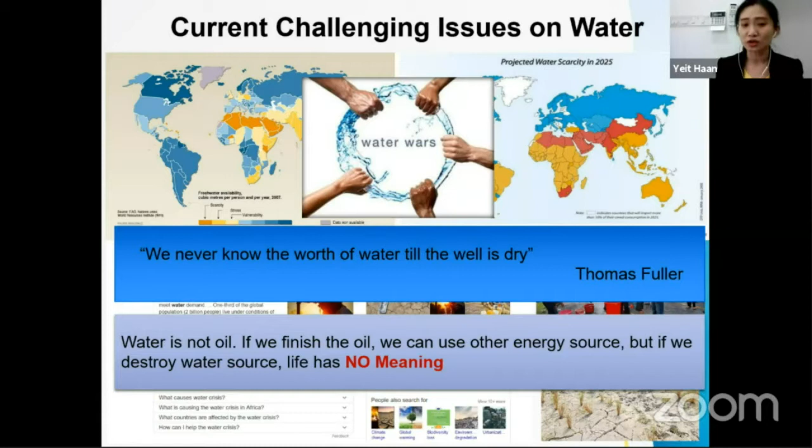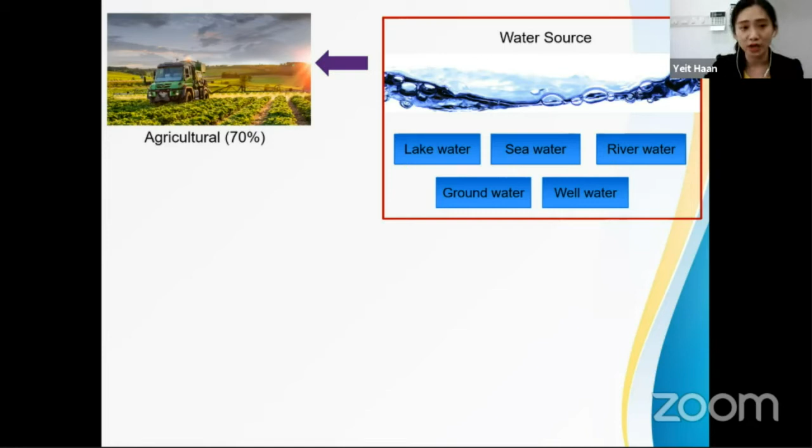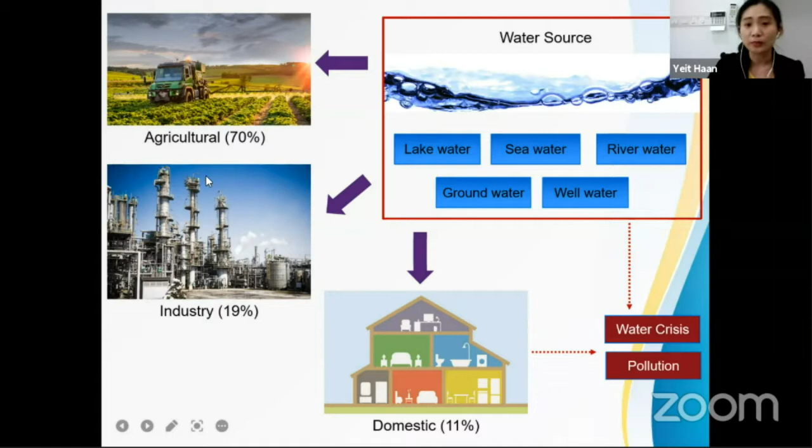Water is also not oil. If we finish the oil, we can use other energy resources like renewable energy to replace it. But if we destroy water sources, life has no meaning. For water sources, we have plenty, like lake water, sea water, river water, groundwater, and well water. And for the distribution of water usage, about 70% is used for agriculture, 19% for industry, and about 11% domestic. However, because the water we can utilize is very limited, there is a potential for water crisis. At the same time, the processed water from industry can cause pollution.

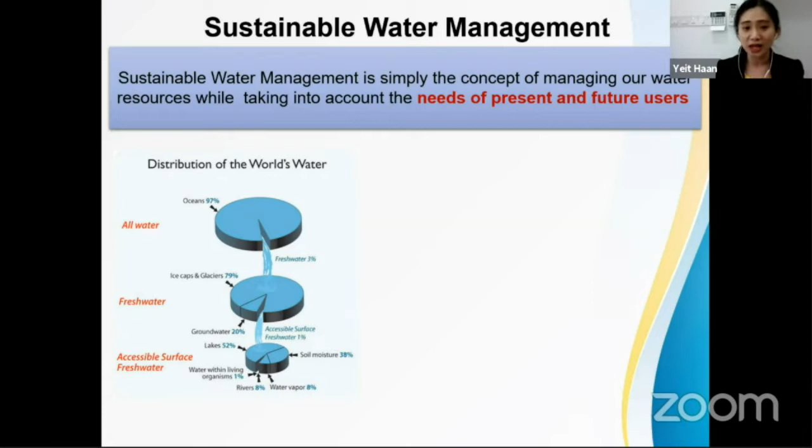So I would like to introduce to you the sustainable water management concept. Sustainable water management is simply the concept of managing our water resources while taking into account the needs of present and future users. So this is the distribution of the world's water. As I say, our planet has plenty of water. The ocean itself consists of 97%. However, the fresh water that we can utilize is only 3%. And out of this 3%, the accessible surface fresh water is only 1%. Can you imagine that? And in Asia especially, water use is the highest in the world.

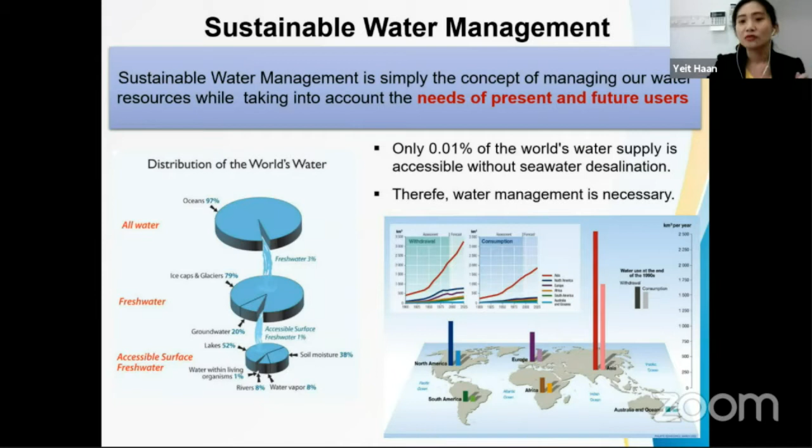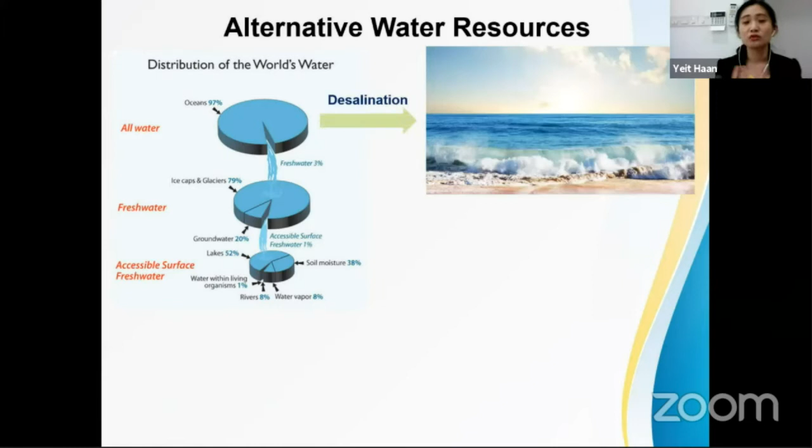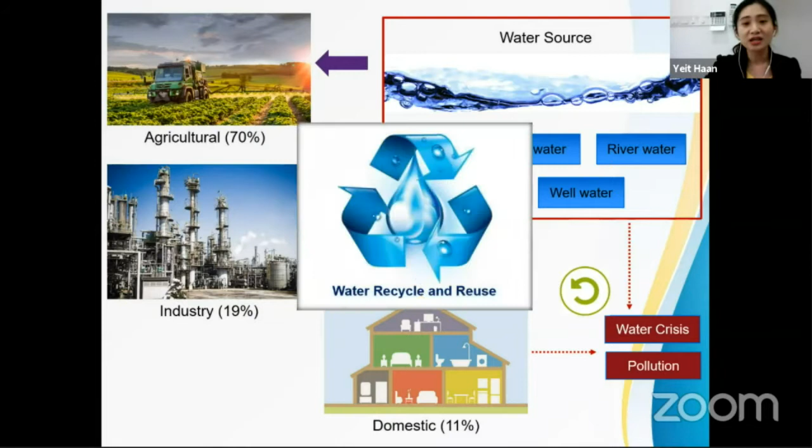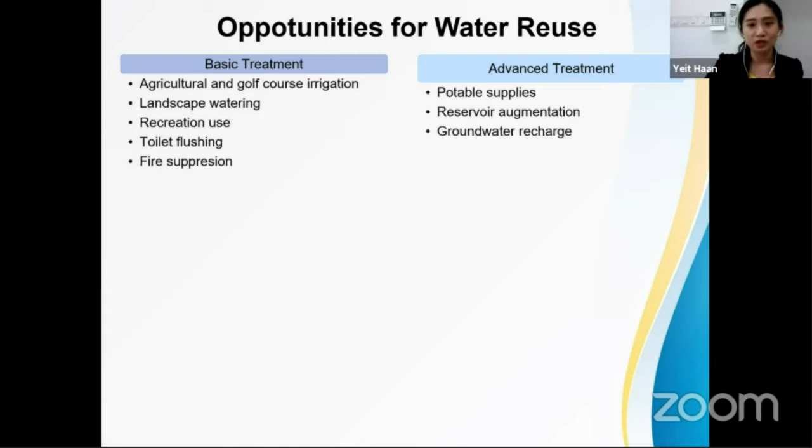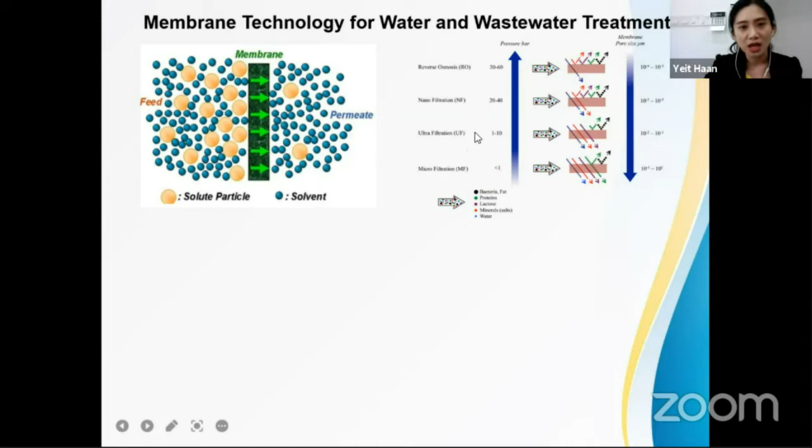So I would like to introduce to you a technology used for water and wastewater treatment, which we call membrane technology. In simple words, it is just a semi-permeable membrane used in a system whereby a physical separation process separates the solute particles, while allowing the water to penetrate through the membrane pores to achieve clean water on the permeate side. Membranes have different categories: microfiltration, ultrafiltration, nanofiltration, and reverse osmosis. It depends on the operating pressure as well as the pore size of the membrane. And each membrane also has different rejection ability, increasing from microfiltration, and the highest one will be reverse osmosis.

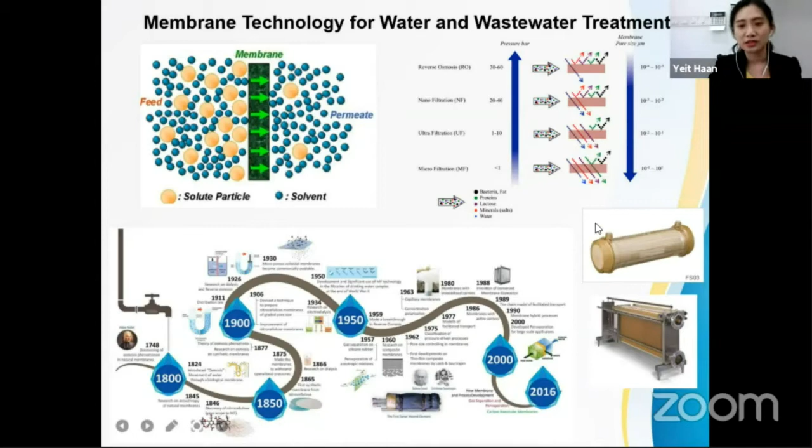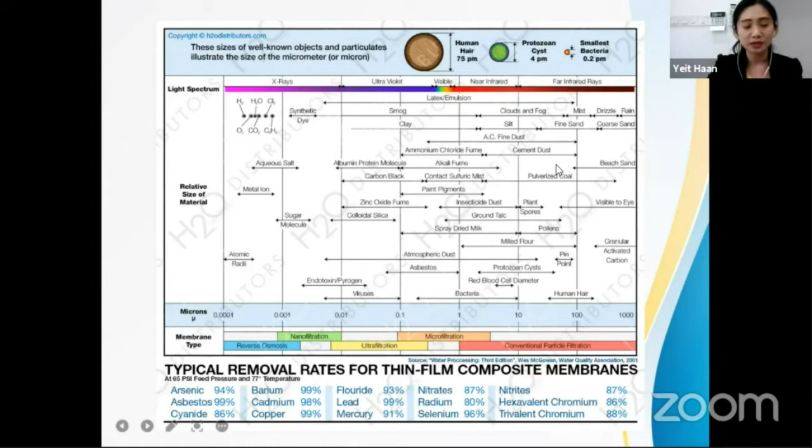And this is the development pathway of membrane technology. And here is the example, or the photograph, of the membrane and how it looks. And this table shows you the rejection ability of different membranes and the size of the materials that each membrane type can reject.

So for us, especially as researchers, we know that the technology is ready. Most of the technology is already developed from the R&D perspective. And there is an industry that is really ready to take on this technology. And why not? Here comes the collaboration between technology and industry to create larger revenues for the water and wastewater industry. So let's take a closer look at our nearby country, Singapore.

The project in Singapore, the NEWater project for water recycling. This is the process of NEWater in a Singapore treatment plant, and they are using membrane technology to achieve water reclamation. The treated used water passes through the membrane. The membrane is here. They are using both microfiltration and reverse osmosis membranes for disinfection. And at the end of the day, they were able to obtain high-grade reclaimed water.

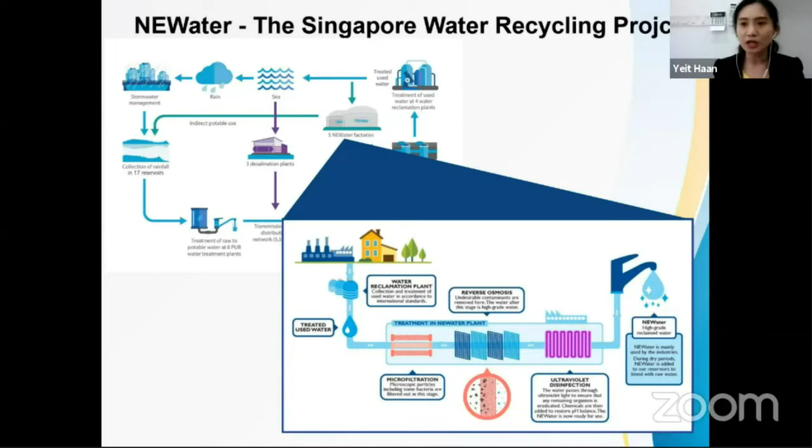So at this standpoint, I started to ask myself, is there any possibility that Malaysia also has this capability to do the same thing or even better? And here started my journey to sustainable water management.

So the report from the Singapore Water Reclamation Study Expert Panel review findings shows that the physical, chemical, and microbiological data for NEWater are well within the latest requirements for the US EPA Drinking Water Standard and WHO Drinking Water Quality Guidelines. Exposure to or consumption of this NEWater does not give any carcinogenic or estrogenic effects on the fish. NEWater is considered safe for potable use based on comprehensive physical, chemical, and microbiological analysis of NEWater conducted over 2 years.

And with this, I started my project in collaboration with Indah Water Konsortium Sendirian Berhad. Indah Water approached me for a project whereby they would like to add value to their treated sewage or treated bioeffluents. So to add value to their treated effluents, we went through a study on effective and economic disinfection, because we would like to kill the bacteria inside the sewage water so that the treated water can be safe for human body contact.

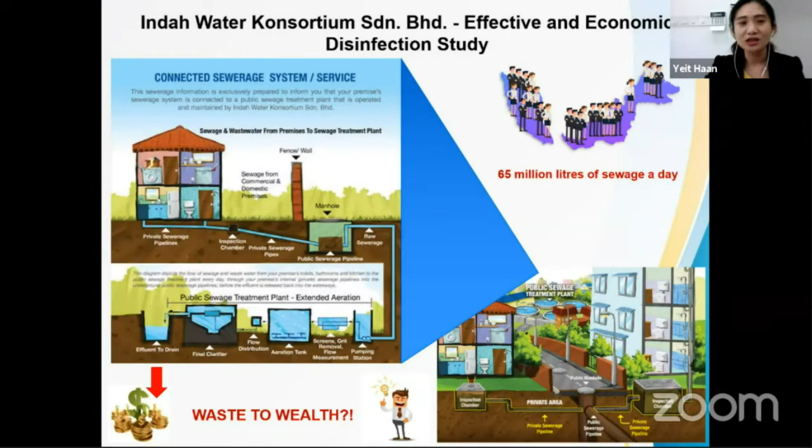And this is the connected sewage system or service. I believe there is no need to go deeper. And we know that Indah Water Konsortium Sendirian Berhad serves Malaysia, and about 65 million liters of sewage are treated a day. And let's think about the waste to wealth concept and how much we can gain from it. So here I started with my planning, whereby I have several treatment strategies for this Indah Water bioeffluent.

It could be a single treatment of UV, chlorination, microfiltration, and ultrafiltration, or an integrated process of GAC UV, EMM UV, and so on. So this is the system flow diagram and how it looks. It can be used either for single treatments or for the integrated system.

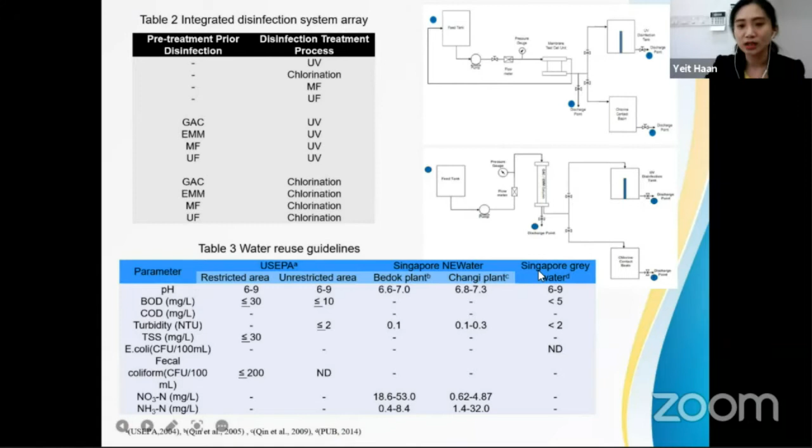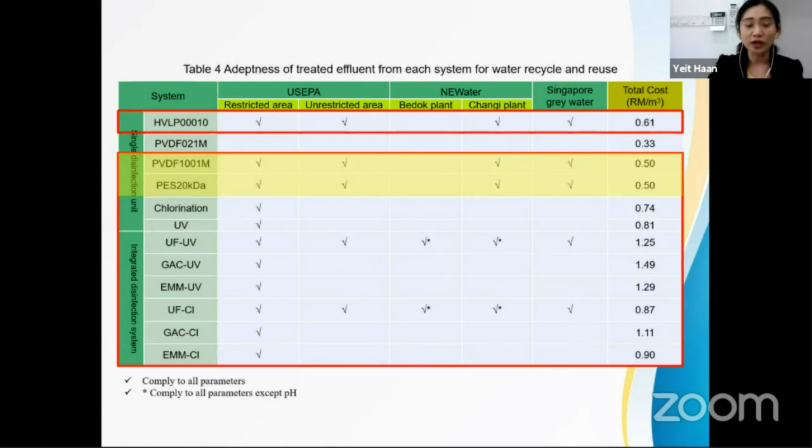And I found out that all these red boxes are the systems able to achieve the US EPA restricted area standard, and out of them, the PVDF membrane and PES membrane have the cheapest cost. This cost is calculated including both CapEx and OpEx. On the other hand, I also tested against the unrestricted area quality, and found that the technologies in the red blocks are able to achieve unrestricted area water quality, and the lowest cost is still achieved by the PVDF and PES membranes.

Another project that I would like to share with you is the Sime Darby Research Sendirian Berhad project on water recycling and reuse. We know that Sime Darby is the largest agriculture industry in Malaysia, and they discharge a lot of wastewater, which we call palm oil mill effluent. This is the single largest industrial wastewater in Malaysia and often causes problems.

Because of this, many countries have banned palm oil, and this creates some issues. So we would like to create a zero waste technology for Sime Darby. For today, I will not go into details for the other technologies; I will just focus on the last stage, the palm oil mill effluent water recycle and reuse.

Sime Darby told us that they would like to achieve water with the quality of boiler feed water. Therefore, we designed a process including an integrated system of biofilm pretreatment, media filtering, ultrafiltration membrane pretreatment, and lastly the reverse osmosis membrane.

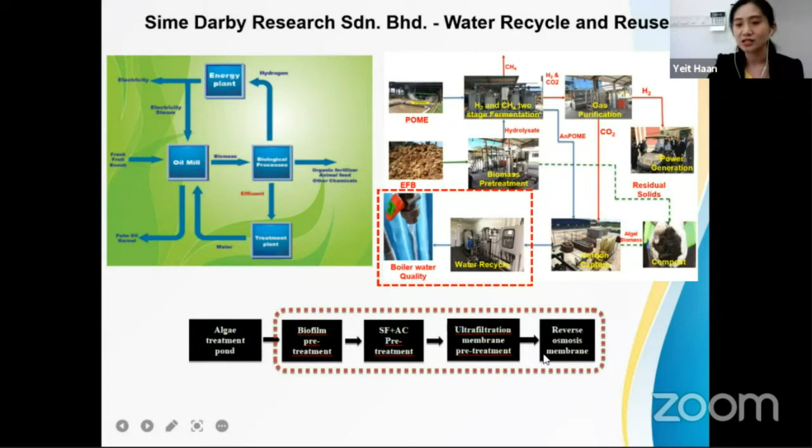So this is how the system looks like. The layout of the system has three stages as I mentioned: we have the pretreatments, the biofilm pretreatment, the sand filter, activated carbon filter, and ultrafiltration pretreatment, along with the membrane treatment as the last stage.

From lab scale study, we managed to convert it into pilot scale, and we even optimized the process at the Sime Darby plant. This plant has been built in Batang Berjuntai, Kuala Selangor.

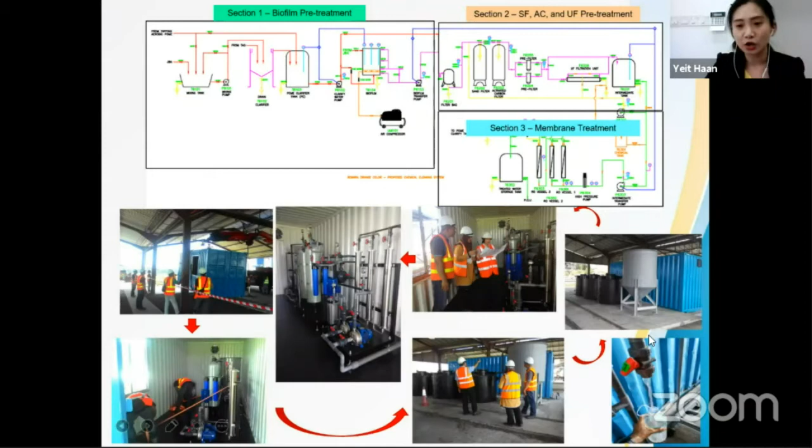This is photos taken in the pilot plant that we built. The deliverable of this project is that we managed to design a pilot scale membrane treatment system integrated with pretreatments, and this integrated pilot plant managed to produce recycled water at boiler feed grade under optimum operating conditions. This is how the water quality looks like after each stage of treatment.

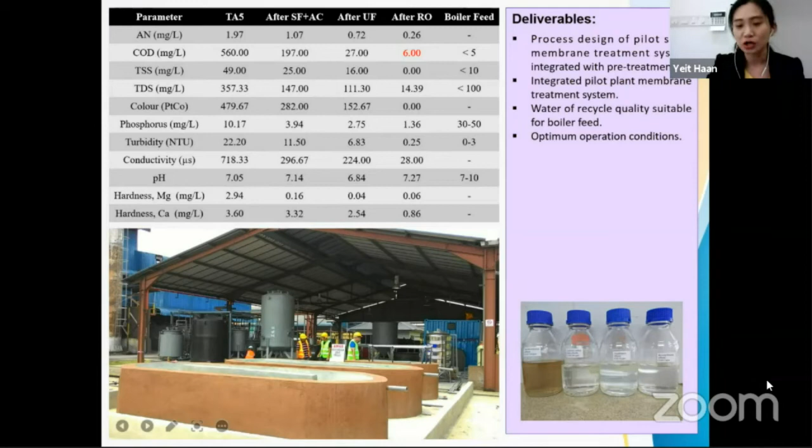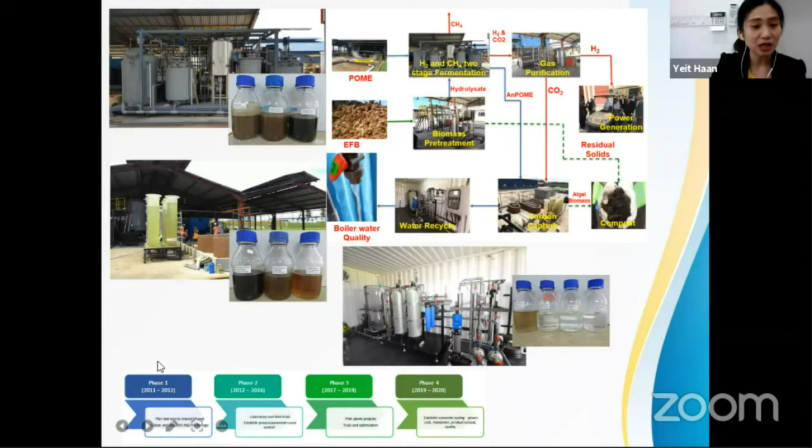Here is the summary of the project, with its different stages, and this is the membrane filtration system with the quality dimensions. This is the development phase of the project from year 2011 until 2020, where we started from a lab scale theoretical study and upscaled until pilot scale. Here is the pilot plant that we have.

So the next project is with Infineon Technologies Sendirian Berhad. This project is on silicon recovery with enhancement of wastewater treatment. We know that other than the palm oil industry I mentioned, Malaysia also exports about 37.78% of E&E products, and the semiconductor industry plays a very important role in this E&E industry.

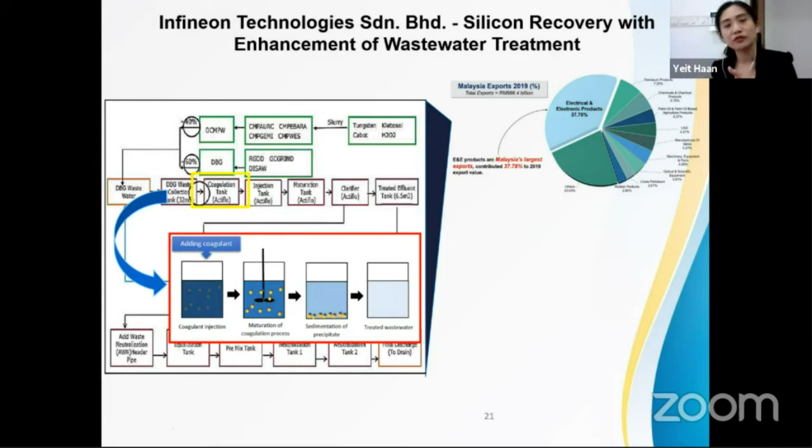The conventional treatment process in the semiconductor industry uses a coagulation process, adding coagulants into their wastewater to get flocs, then sedimentation. After that, they go through a filter press system to press it and get the sludge, separating the sludge from the treated water.

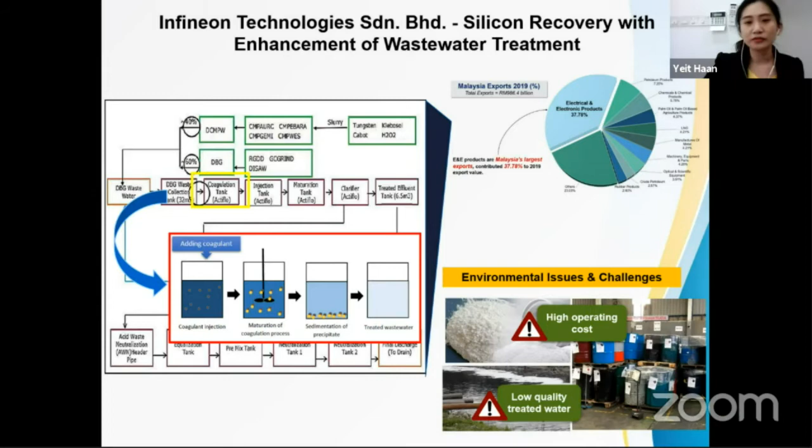However, there are environmental issues and challenges faced by this semiconductor industry because of solid waste disposal, which causes high capex for solid disposal charges over time. They have to use expensive chemical coagulants, leading to high operating costs. The treated water also has low quality, and this water can only be directly discharged into the river without recycling or reuse. So this company came to me and said, is it possible that we make our industry more sustainable and greener?

And I said, yeah, possible. So we came up with the idea, because there are precious materials in their wastewater. Why don't we have a system with two benefits in one? The silicon particles inside their wastewater are precious materials to them.

So I said membrane filtration can do that. With a membrane filtration system, your silicon particles can be recovered for reuse for other purposes, like converting into wafer or selling to a solar panel company. At the same time, the treated water will have higher quality so you can reuse it in your plant for other purposes.

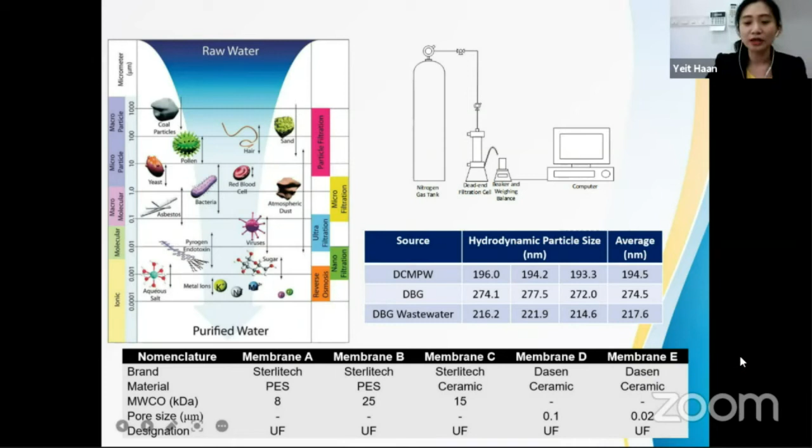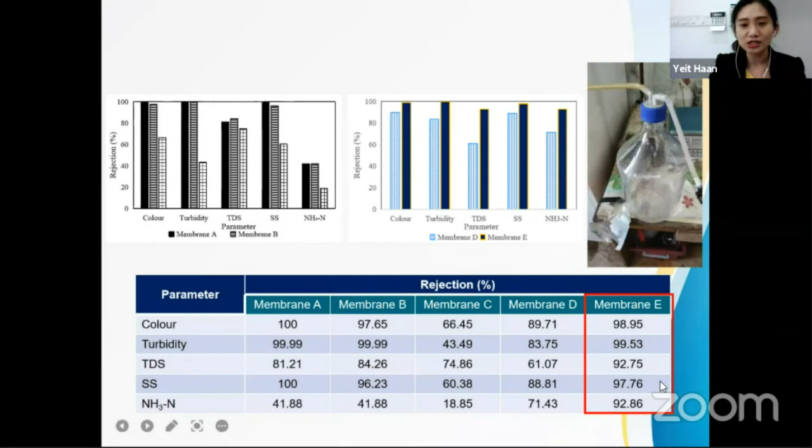So we agreed to this project, and we designed a system for a lab scale study with different membranes, A, B, C, D, E, to check their efficiency. Here is the data from the project, where we found that one membrane has the highest rejection efficiency, more than 90%, and the collected silicon particles from the membrane filtration process reach as high as 99.99%.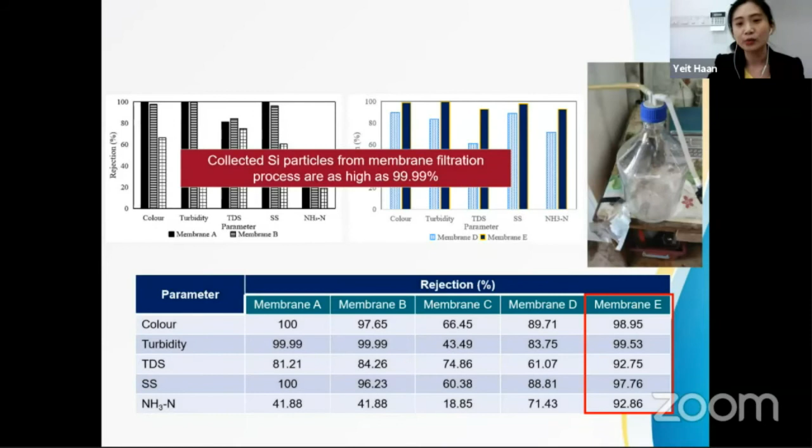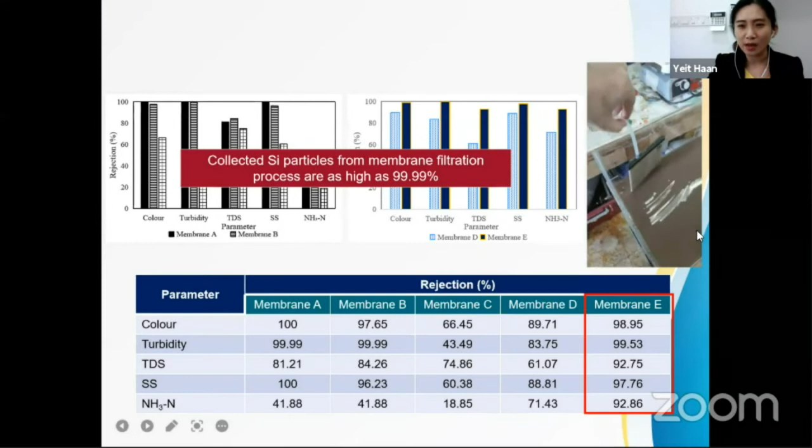Here are the videos showing the water we collected from the semiconductor industry, which is gray and blackish in color, and we managed to produce clean water from there.

So next one, we already identified, or we already have several projects on industry partners. So for the industry applications, we need research to support. So here are the research or R&D behind this industry project.

One of the methods I would like to share with you, the technology that I use in water treatment, is membrane technology. But is there any obstacle for this technology, and how do we encounter this obstacle? One of them is the in-situ colloidal precipitation method.

This is the method developed by me and my team, whereby the conventional treatment method just uses polymer solutions to produce the membrane. However, the membrane might face problems of fouling, and the fouling will shorten the lifespan of the membrane. This is also the reason why most of the industry players keep criticizing that membrane is not sustainable, membrane has a high cost, because they have to keep changing the membrane once fouling is very severe.

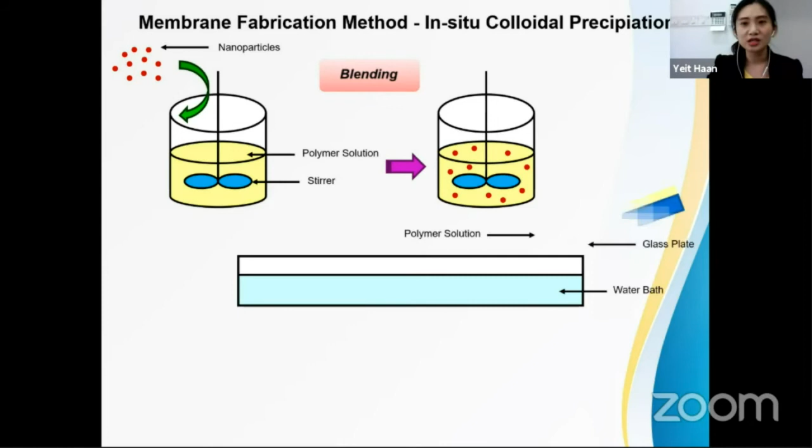So for this technology, nanoparticles are incorporated into polymer solutions. And from this in-situ colloidal precipitation method, we managed to produce membranes that have less fouling.

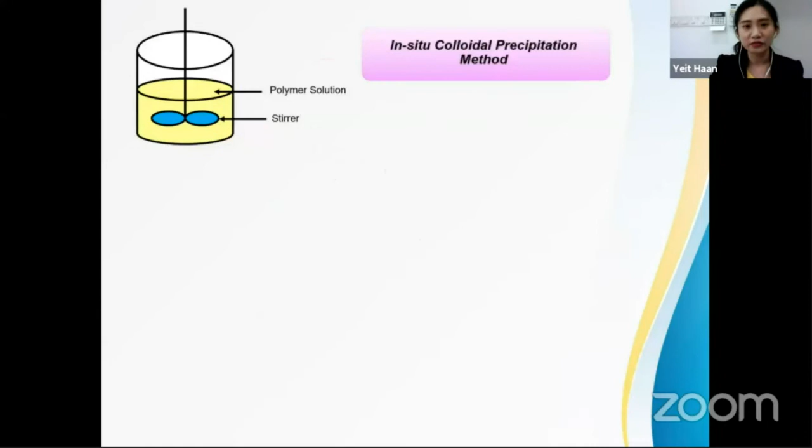So this is the blending method, the conventional one. The blending will create some defects on the membrane surface. However, for the in-situ colloidal precipitation method, using this kind of mechanism, you can see that the nanoparticles can distribute evenly at low concentrations. There is no issue of agglomeration, and no issue of defects on the membrane surface.

We found out from this RSM study that we managed to reduce the fouling effect, and we can even improve the membrane performance by 179 to 186%. This is another R&D project I would like to share with you, from another perspective.

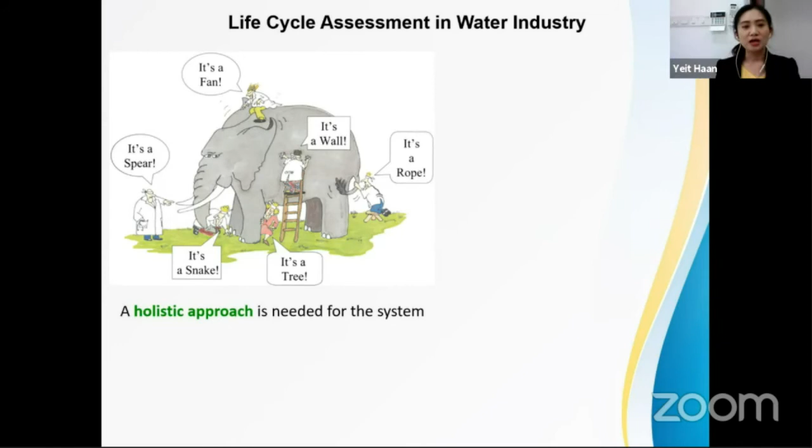When we talk about green and sustainable technology, usually the industry partner will tell us, can you give me quantitative data showing that your technology is green and sustainable compared to the current technology I have? How can I prove it? We need a holistic approach for the system.

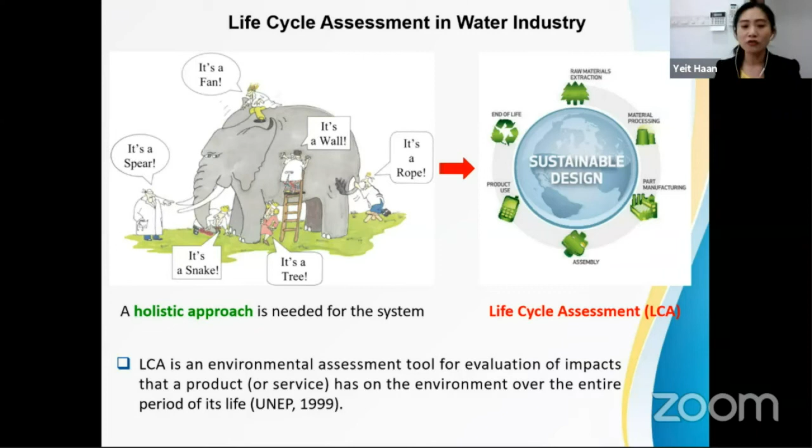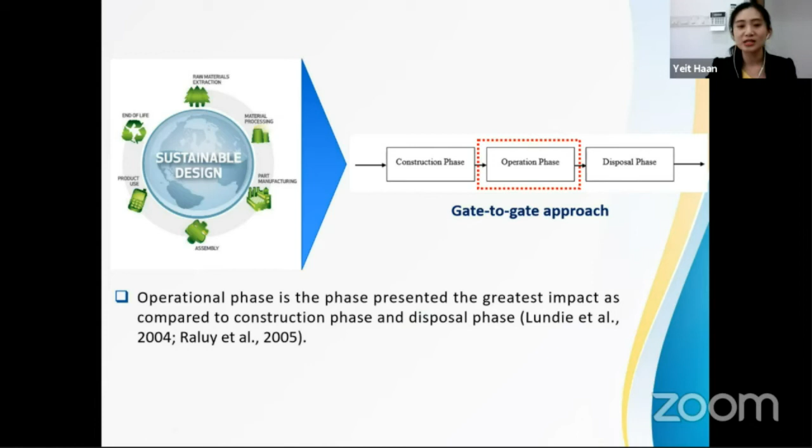The holistic approach we use is life cycle assessment, whereby life cycle assessment is an environmental assessment tool for evaluating the impact a product has on the environment over the entire period of its life. Because the membrane is just involved in the operation phase, I will utilize the gate-to-gate approach methodology. The operational phase presents the greatest impact compared to construction.

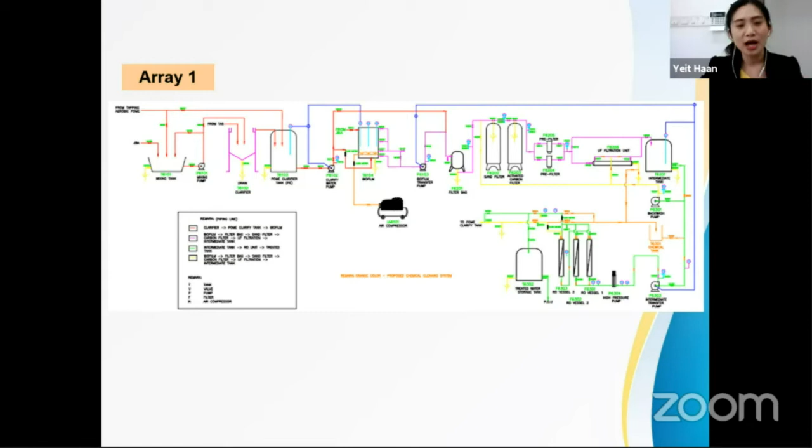This is the diagram I showed you previously for the Sime Darby project, the same project I use for this life cycle assessment study. For this Sime Darby project, I can manipulate it with different arrays or combinations, so we can bypass some of the system, and I'm studying different arrays to see how the environmental impact looks.

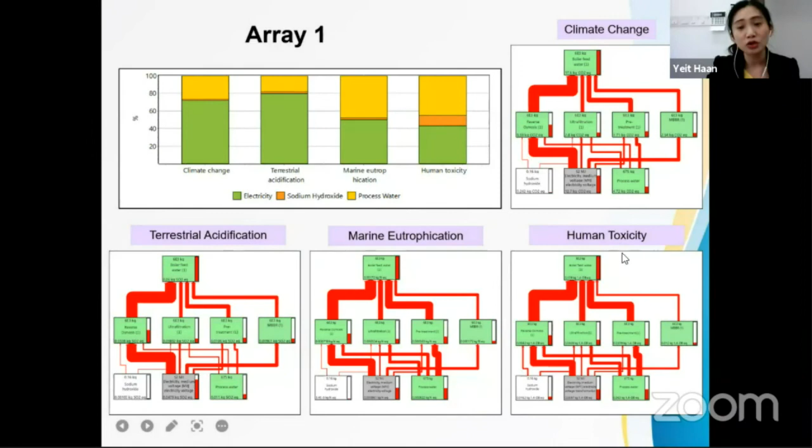For this life cycle assessment, the interesting thing is you can see from the system what is the climate change impact, the terrestrial acidification impact, marine eutrophication, and human toxicity impact for each system. From the system, you can reach a conclusion or comparison - all these systems will produce boiler feed water, and different arrays have been utilized for the system, showing which system is actually the most eco-friendly.

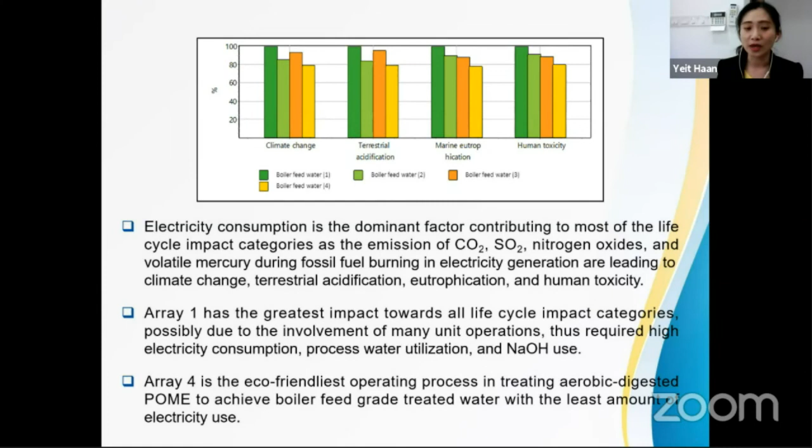As a summary for this life cycle study for the Sime Darby project, we found that electricity consumption is the dominant factor. Array 1 has the greatest impact towards life cycle impact categories because it involves many unit operations and requires high electricity consumption, process water utilization, and chemical use. For array 4, comparatively, it is the most eco-friendly operating process in treating aerobic-digested POME to achieve boiler feed grade treated water with less electricity use.

Other than that, the membrane technology I mentioned to you previously, either from the industry applications perspective or the R&D perspective, is more towards an advanced treatment. Other than advanced treatments, I'm also unlocking the potential of biomass as an adsorbent for pre-treatments.

So again, this project is a collaboration with Sime Darby, utilizing their POME as well as the palm kernel shell in order to synthesize the adsorbent.

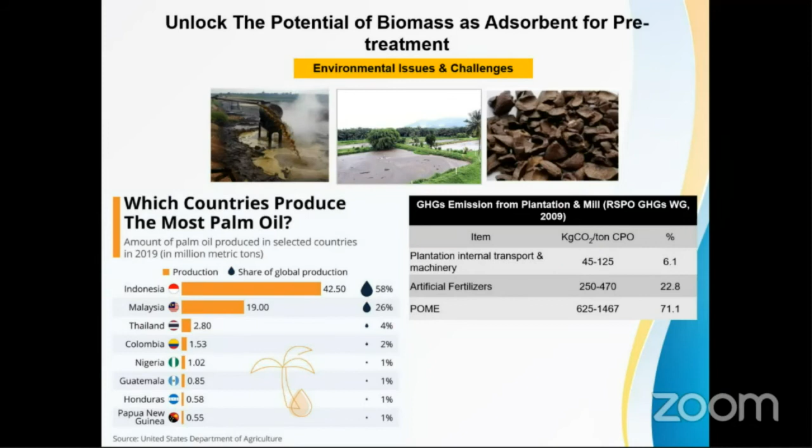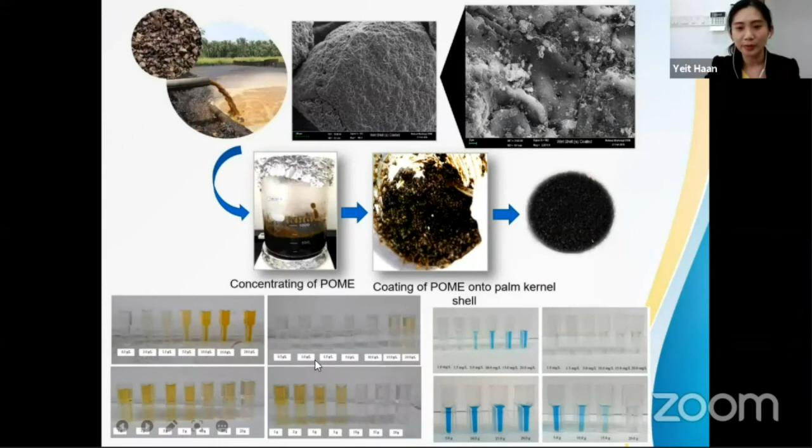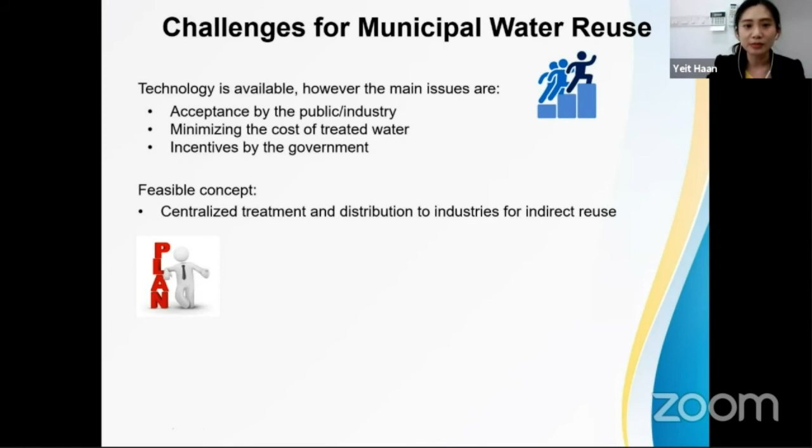So this is the process to convert the biomass into the adsorbent and the treated water quality we achieve. We even tested with industry wastewater, and this is the quality we achieve. The challenges of municipal water reuse include acceptance by the public, minimizing cost, as well as incentives by the government.

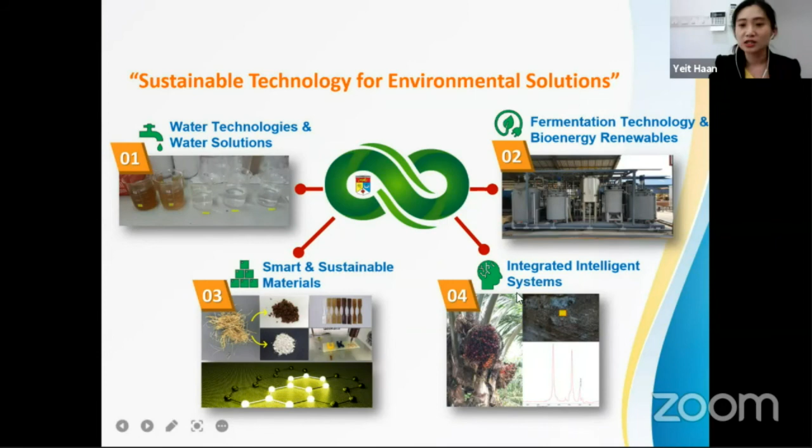Other than this team, we also have other team members working on smart technologies, intelligence systems, as well as renewable energies. And also I'd like to promote the conference we are going to hold at the end of this year. That'll be the end of my presentation today.